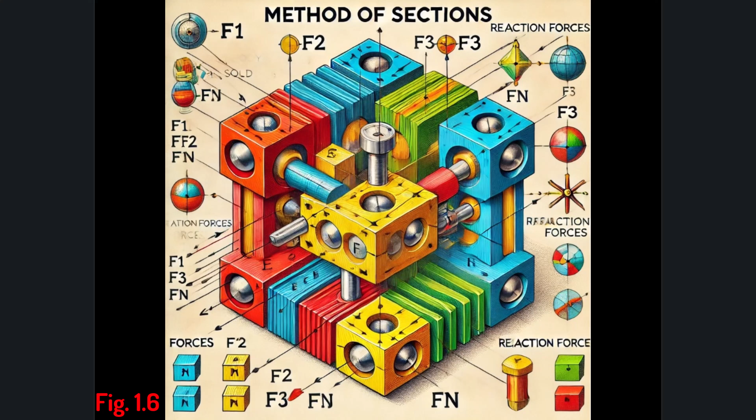But here's an important point. Even if the body is in motion, perhaps accelerating, we can still treat it as being in static equilibrium for a specific moment in time by applying what we call fictitious inertia forces. These reversed effective forces act through the mass center of the body. This method of simplifying a dynamic problem into a static one is referred to as D'Alembert's principle.

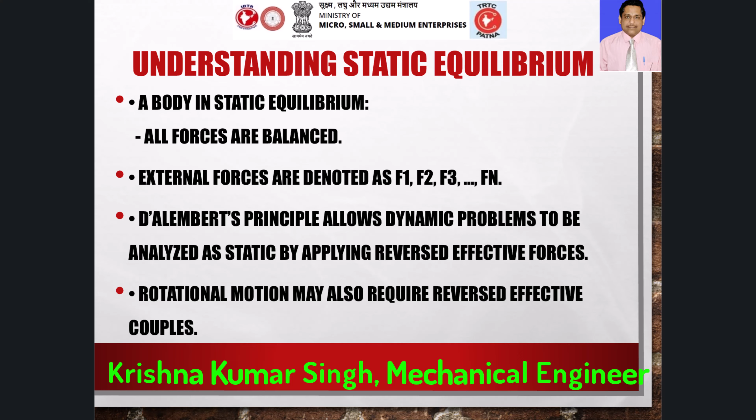For example, if the body is not just moving in a straight line but is also rotating, we need to apply reversed effective couples to maintain static equilibrium.

Cutting the body, method of sections. Now let's break the body into two parts. Imagine a plane labeled as MN cutting the body into two sections, part 1 and part 2. This hypothetical plane intersects the lines of forces that represent the interaction between molecules situated on both sides of the cut, as shown in figure 1.6b.

By cutting the body into two parts, we isolate the internal forces between them. These forces are labeled as A1 and A2, corresponding to part 1 and part 2 respectively.

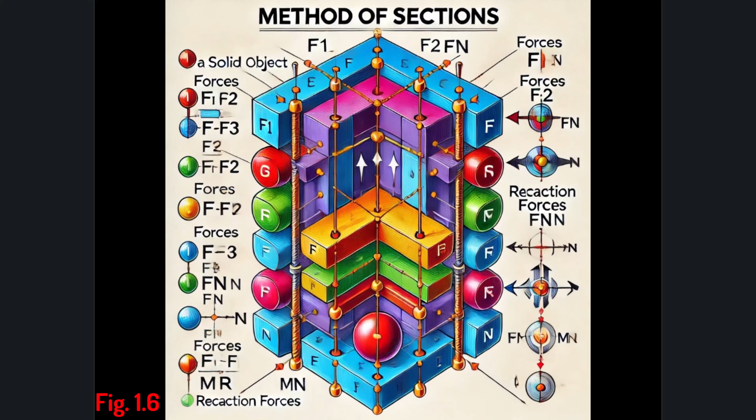Since these two parts are no longer connected, the internal forces acting between them must now be treated as external forces. According to the principle of action and reaction, the forces on A1 and A2 are equal in magnitude but opposite in direction. Thus, the system of forces on either A1 or A2 represents the internal forces of the material.

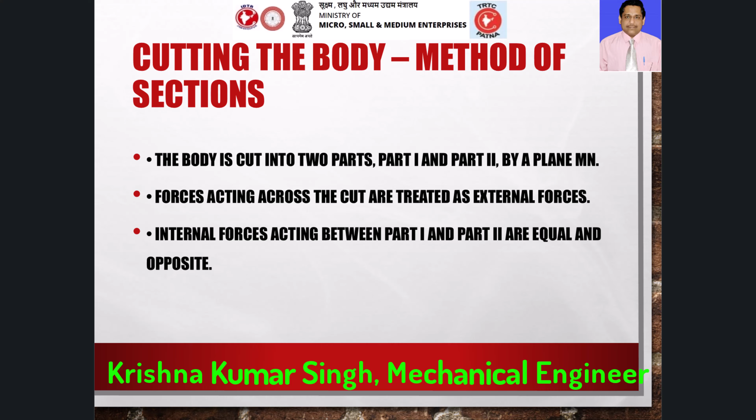Equilibrium of forces and moments. Once we've separated the two sections, we analyze the forces and moments acting on them. For example, the system of forces on A1 can be reduced to a force, Fr, and a couple, Mr, acting at a specific point. Let's call it O.

At the same time, the forces acting on A2 must balance these forces. The force on A2 is represented by -Fr and -Mr at the corresponding point O in part 2. Remember, O and O are the same physical point where the forces interact.

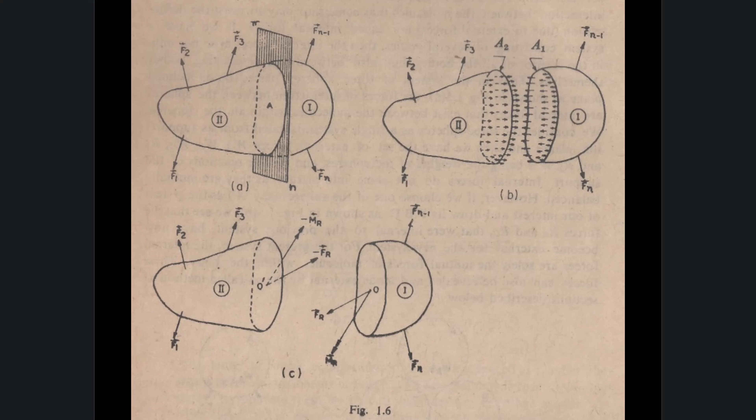Now let's talk about the equilibrium equations for both parts of the body. For part 1, we have sum Fn plus Fr equals 0, sum Mn plus Mr equals 0. For part 2, the equations are similar but with opposite signs: sum Fn minus Fr equals 0, sum Mn minus Mr equals 0. The sum of the forces and moments acting on both parts of the body must be 0 because the entire body is in static equilibrium.

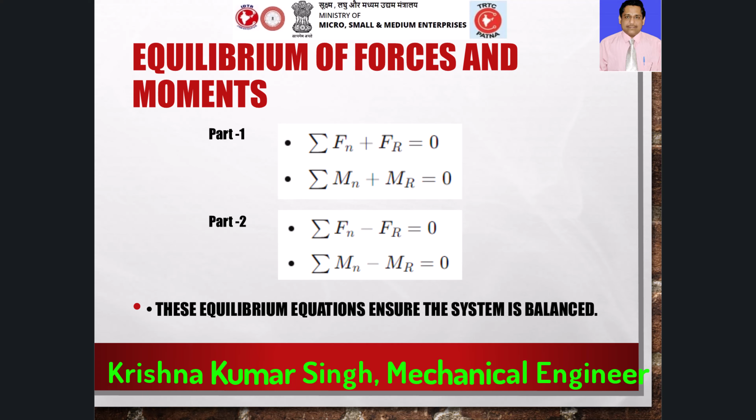The stress resultants. Now, let's introduce the concept of stress resultants, which are the internal forces and moments distributed across the section. These resultants are expressed in terms of Cartesian coordinates. For example, the resultant force Fr and moment Mr acting on a section can be written vectorially as Fr equals Fxx i plus Fxy j plus Fxz k, and Mr equals Mxx i plus Mxy j plus Mxz k.

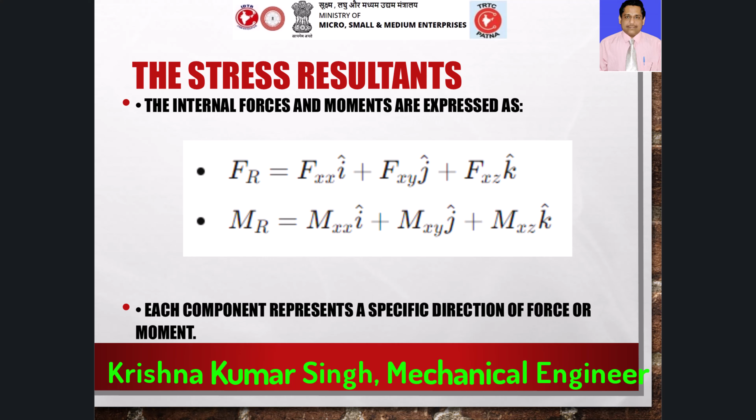Here, each subscript corresponds to the direction in which the force or moment acts. For example, Fxx is the component of force in the x direction, and Mxx is the twisting moment about the x-axis. Internal force components. Let's break these components down a little more.

The 6 internal force factors that we'll be dealing with are: 1. Fxx, the normal force, which acts perpendicular to the section. If this force pulls away from the section, it's tensile, and if it pushes towards the section, it's compressive. 2. Fxy and Fxz, these are tangential forces, or shear forces. They act parallel to the section, causing sliding between the sections.

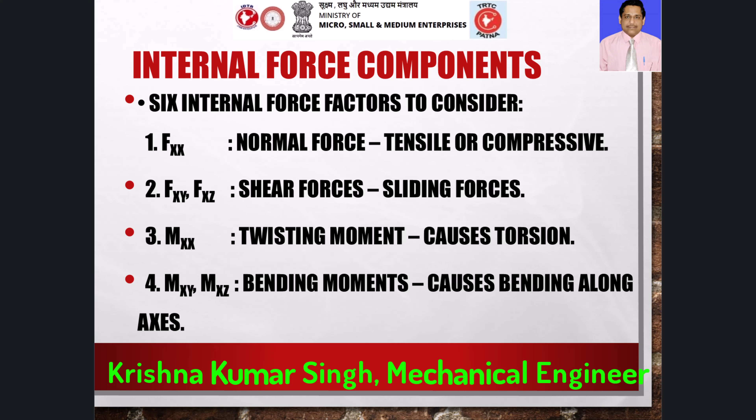3. This is the twisting moment, which causes torsion along the bar. 4. Mxy and Mxz, these are bending moments that cause the bar to bend along the Y and Z axes, respectively.

Modes of load transmission. When analyzing any material or structure, it's important to understand the four basic modes of load transmission. 1. Tension or compression, forces that elongate or shorten the body. 2. Shear, forces that slide one part of the material past the other. 3. Torsion, forces that twist the material. 4. Bending, forces that cause the material to bend along its length.

In many cases, a combination of these forces may be acting on the body at the same time.

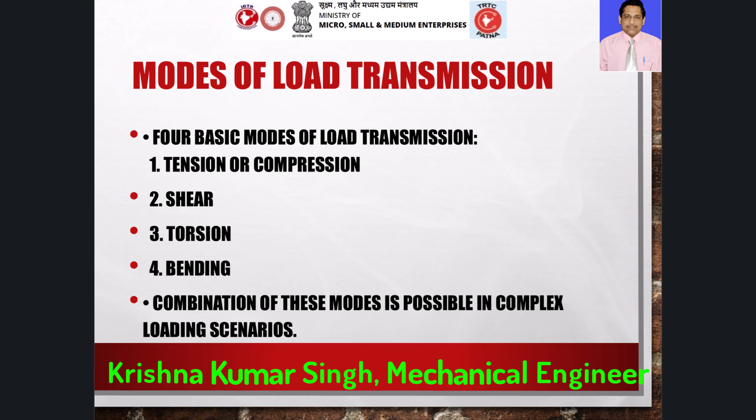To conclude, let's summarize the steps in applying the method of sections.

First, cut the bar using a hypothetical plane. Second, remove one portion of the bar, either to the left or right of the section. Third, apply forces and moments at the centroid of the section to balance the external forces acting on the remaining portion. Fourth, solve the equations of equilibrium to determine the internal forces and moments.

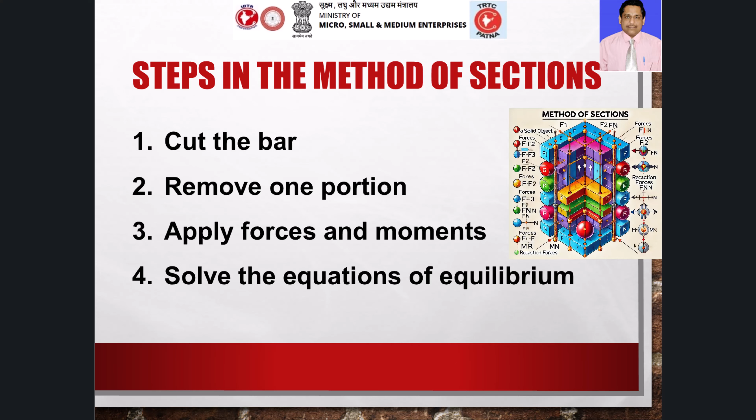Method of sections. We consider a body S in static equilibrium subjected to a set of external forces, F1, F2, F3, Fn, as shown in Fig 1.6a.

Even if the body is actually not in static equilibrium, for instance, if it is in motion having an acceleration, we can treat it as being in static equilibrium for a particular moment, provided we apply the fictitious inertia forces, also called reversed effective forces, as external forces acting through the mass center of the body at the given instant.

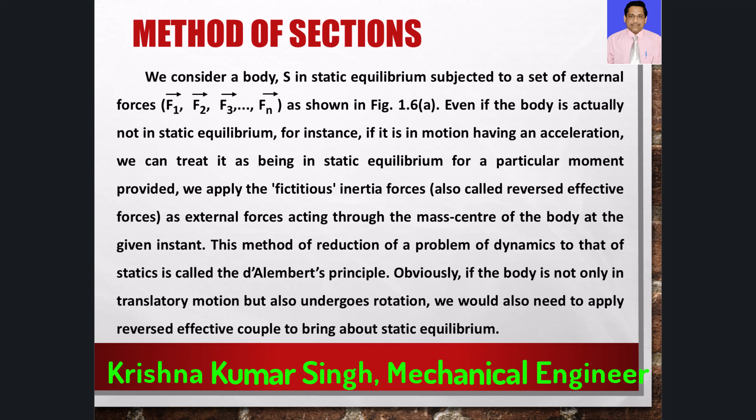This method of reduction of a problem of dynamics to that of statics is called D'Alembert's principle. Obviously, if the body is not only in translatory motion but also undergoes rotation, we would also need to apply a reversed effective couple to bring about static equilibrium.

We now imagine a plane MN through the body, cutting it into two parts, I and II. This hypothetical plane must also intersect the lines of forces of interaction between molecules situated on the two sides of the interface, A, the common surface of the two parts.

Our next step is to imagine that the two parts of the body have been separated. We distinguish the two sides of the interface by A1 and A2, belonging to Part 1 and Part 2, respectively, as shown in Fig 1.6b.

Since the two parts are no longer connected, it is necessary to replace the action of molecules on A1 on the molecules on A2 by a system of forces acting on A2, the section of Part 2. Similarly, there is a system of forces acting on A1, the section of Part 1.

According to the principle of action and reaction, the system of forces on A1 is reciprocal, i.e., equal in magnitude, opposite in direction, and having the same line of action as the system of forces on A2. Thus, the system of forces on either A1 or A2 represents the internal forces, though they have been converted into external forces relative to Part 1 or Part 2 by the method of sections.

Following our basic assumption in Article 1.3, the internal forces are continuously distributed over the surface of the section. In general, their distribution is rather complex. However, they must be so distributed as to satisfy the equations of equilibrium for Part 1 and Part 2 separately. Since the whole body is in equilibrium, any part of it must also be in equilibrium.

The system of forces on A1 can be reduced to a force Fr and a couple Mr at any point in the section, say O. Then the resultant of the forces on A2 must be minus Fr and minus Mr, at the corresponding point O in the section A2, see Fig 1.6c. Remember that O and O are the same point physically.

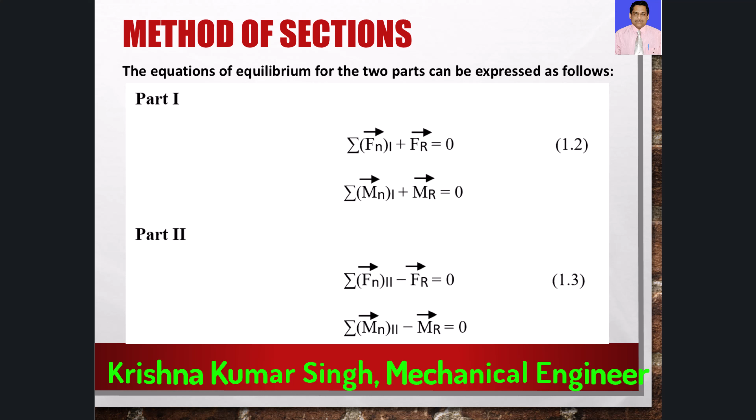The equations of equilibrium for the two parts can be expressed as follows. Part 1: sum Fn1 plus Fr equals 0 (1.2), sum Mn1 plus Mr equals 0. Part 2: sum Fn2 minus Fr equals 0 (1.3), sum Mn2 minus Mr equals 0, where sum Fn1 and sum Fn2 are the vector sums of the external forces acting on Part 1 and Part 2, respectively.

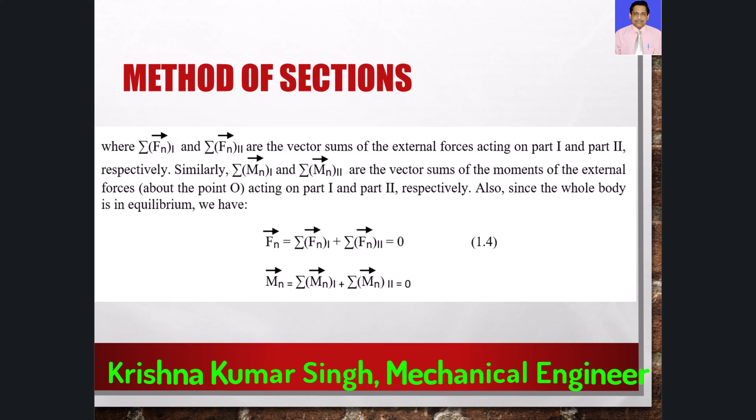Similarly, sum Mn1 and sum Mn2 are the vector sums of the moments of the external forces about point O, acting on Part 1 and Part 2, respectively. Also, since the whole body is in equilibrium, we have sum Fn equals sum Fn1 plus sum Fn2 equals 0 (1.4), and sum Mn equals sum Mn1 plus sum Mn2 equals 0.

Consequently, we find that equations 1.2 and 1.3 are identical. Any one of these is sufficient to determine the resultant of internal forces, also called the stress resultant, at any section, provided we know the external forces. It is also obvious that we need to consider the free body diagram of only one portion of the body, either to the left or to the right of the section, for the evaluation of the stress resultant.

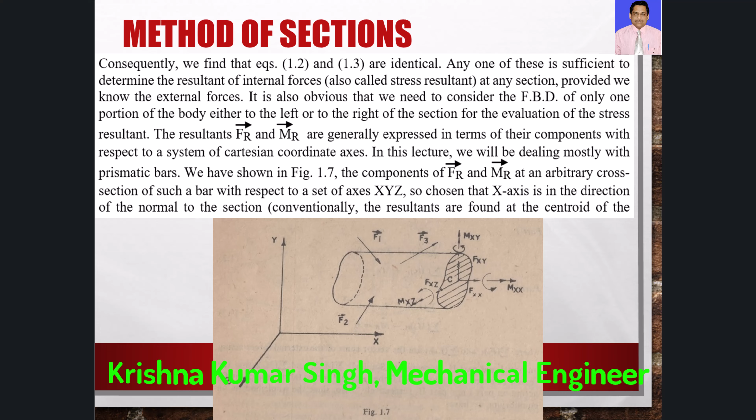The resultants vec F_R and vec M_R are generally expressed in terms of their components with respect to a system of Cartesian coordinate axes. We will be dealing mostly with prismatic bars. We have shown in Fig 1.7 the components of vec F_R and vec M_R at an arbitrary cross-section of such a bar, with respect to a set of axes XYZ, so chosen that the x-axis is in the direction of the normal to the section.

Conventionally, the resultants are found at the centroid of the section. A double subscript notation has been used to designate the components. The first subscript denotes the direction of the outer normal to the section and thereby specifies the section, while the second subscript indicates the direction of the component. Thus, FXX denotes the component of vec F_R on the X section in the X direction. FXY is the component acting on the X section in the Y direction, and so on.

Vec F_R and vec M_R on the given section can be written vectorially as F_R equals FXX i-hat plus FXY j-hat plus FXZ k-hat, and M_R equals MXX i-hat plus MXY j-hat plus MXZ k-hat. The six components, namely FXX, FXY, FXZ, MXX, MXY, and MXZ, are called the internal force factors.

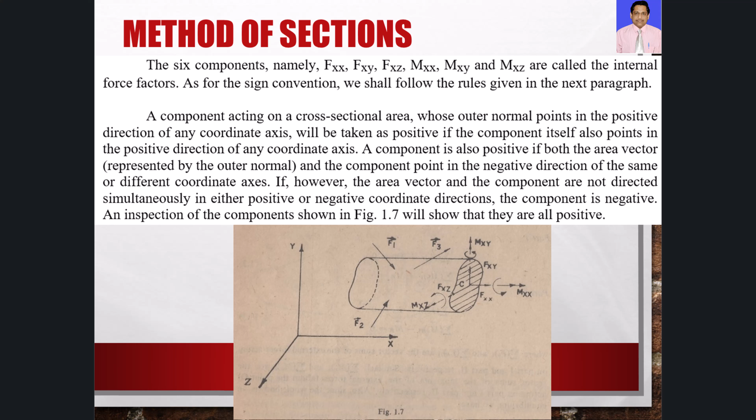As for the sign convention, we shall follow the rules given in the next paragraph. A component acting on a cross-sectional area whose outer normal points in the positive direction of any coordinate axis will be taken as positive if the component itself also points in the positive direction. A component is also positive if both the area vector, represented by the outer normal, and the component point in the negative direction of the same or different coordinate axes. If, however, the area vector and the component are not directed simultaneously in either positive or negative coordinate directions, the component is negative. An inspection of the components shown in Fig 1.7 will show that they are all positive.

Each of the six components on a section reflects a different manner in which the external forces are transmitted across the section, and is therefore given a special name as detailed below. First, the component FXX, normal to the section, is called the normal force. It is tensile if it acts away from the section and compressive if acting towards the section. The tensile force tends to elongate the bar, whereas a compressive force tends to shorten it. If only normal force occurs at the cross sections of the bar along its length, the bar is said to be in pure tension or compression, depending upon the sense of the normal force.

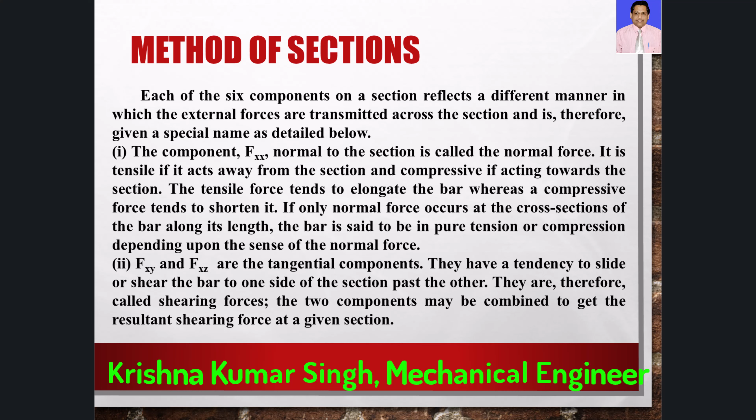Second, FXY and FXZ are the tangential components. They have a tendency to slide or shear the bar to one side of the section past the other. They are therefore called shearing forces. The two components may be combined to get the resultant shearing force at a given section.

The moment component MXX is the moment about the axis normal to the section, and it tends to twist the bar. It is called the twisting moment. If only this moment occurs at the cross sections of a bar along its length, the bar is said to be under pure torsion. Fourth, the moment components MXY and MXZ are the moments about the transverse axes Y and Z of the section.

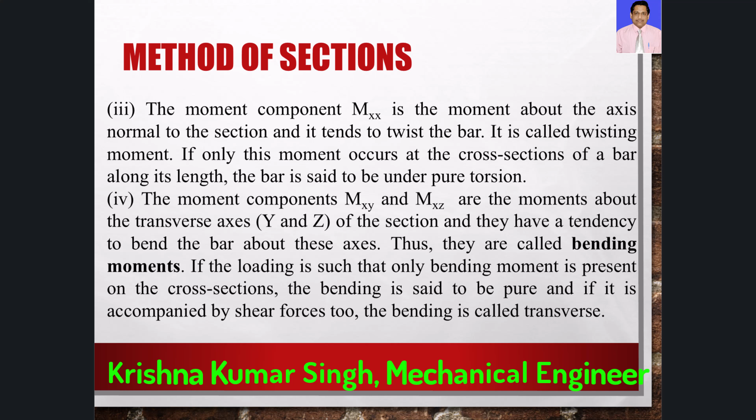They have a tendency to bend the bar about these axes, thus they are called bending moments. If the loading is such that only bending moment is present on the cross sections, the bending is said to be pure, and if it is accompanied by shear forces too, the bending is called transverse.

Thus we have seen that there are four basic modes of load transmission through a member, namely: A, tension or compression; B, shear; C, torsion; and D, bending. The transmission may also take place by a combination of these basic modes.

In view of the importance of the method of sections, we summarize below the steps taken in the method to determine the internal force factors. The steps are: A, to cut the bar by a hypothetical plane; B, to remove one portion of the bar either to the left or to the right of the section; C, to apply at the centroid of the section components of force and moment capable of balancing the external forces acting on the remaining portion of the bar; and D, to finally determine the components of the force and moment from the equations of equilibrium for the system in C above.

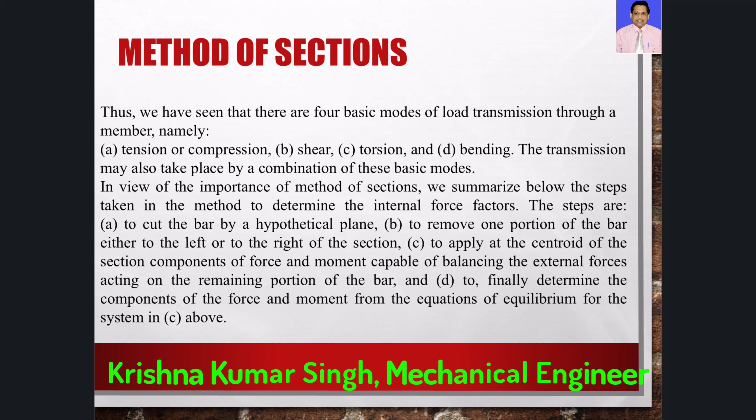And that concludes our discussion on the method of sections.